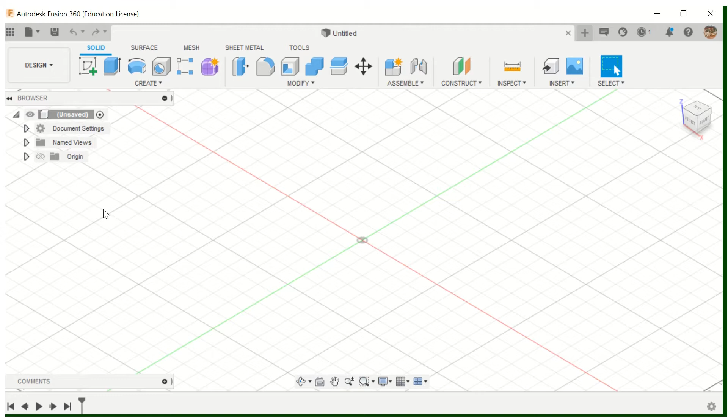The purpose of this video is to work through making holes in Fusion. It's not something we do a whole lot, but we'll see how it goes.

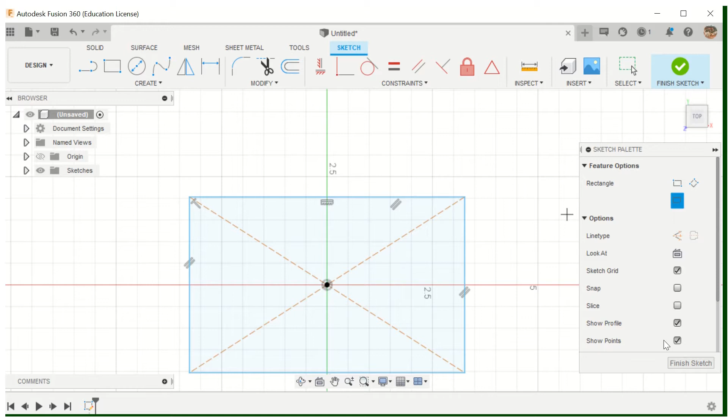So I'm going to create a sketch, and I'm going to create something fairly simple. Let's do a center rectangle, and let's make sure we have some decent dimension. We'll make this 10 inches, and we'll make it 10 by 6.

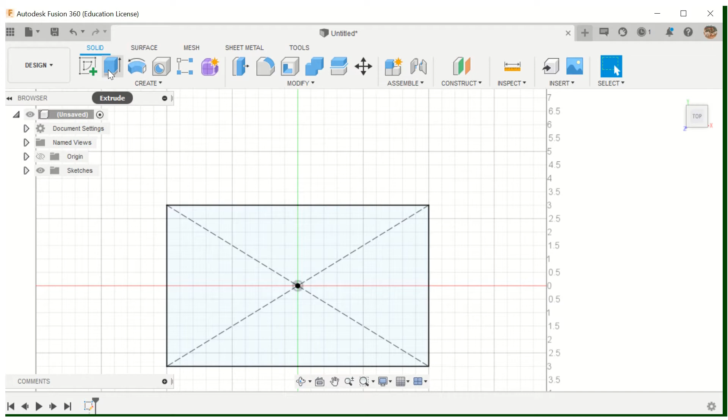Okay, so what's that look like? That looks good. All right, and then let's extrude this, and let's extrude it up to 5 inches. Okay, so basically we've got this nice rectangular prism, and we're going to put some holes in it.

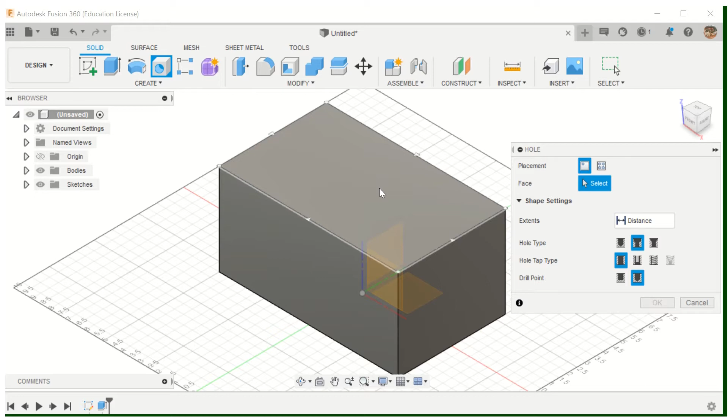So we've got a hole tool here, and if you've played around with this a little bit, hopefully some of this stuff will make more sense to you. You've got a couple options. You can do a single hole, like if I wanted to put a hole at the center, because I used a center rectangle, I could pick that option. You can also pick multiple holes, so you can click several different places at once and do multiple holes. So we're going to do one hole, and where did I put that?

I would like that to be at the center. Whoa, what did I just do? Oh crap. Okay, let's try that again.

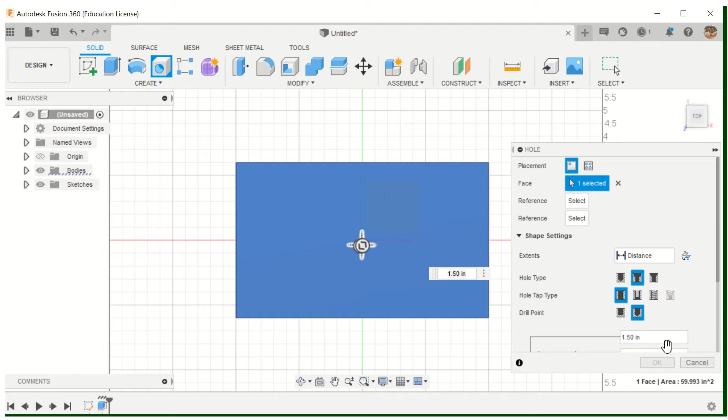Hole, and then we're going to place it, and we're going to pick this face, and I would like to snap it to that point, to snap it to the center point. Not sure I did though. Let me try one more time. Oh, wait a minute, I just made more than one hole. Definitely don't want to do that. Okay.

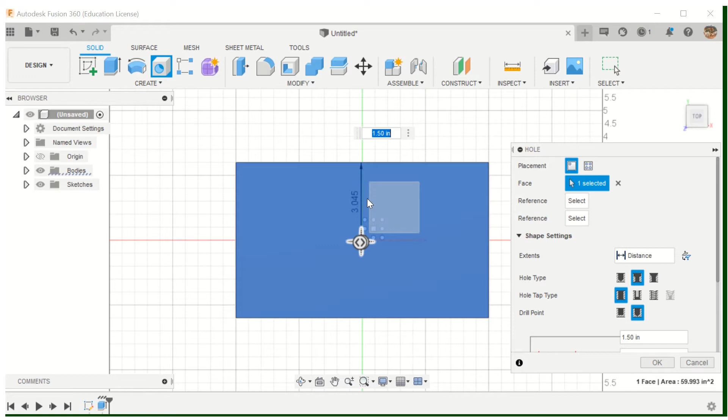Okay, so we would like to place my hole, one hole, a single hole, and I would like to place it here. Okay, and this was at 6. Snap to point. There we go. I think that snapped it for me to 1.5 inches.

All right, now some of this should make more sense to you. Like what kind of hole do you want - a simple hole, a counterbore hole, a countersink? Don't worry about the hole tap type or the drill point. But right here, I should be able to control the dimensions of this hole.

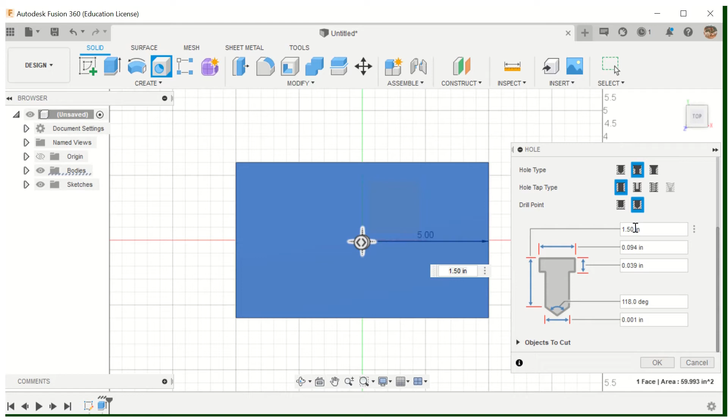So let's say I want the top, it's set for 1.5, but let's just set it for 1 inch for the top. That's fine, that's the hole. How far did I make it go? I made it go, let's make it go 4 inches.

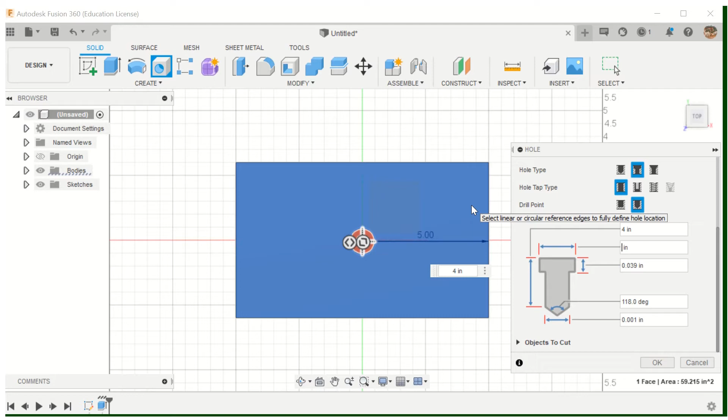And the diameter of the top part of the hole, this is really, really small. I do want to be able to see it. If I make it 1 inch, that looks about right. Let's make it a little bit bigger, 2 inches.

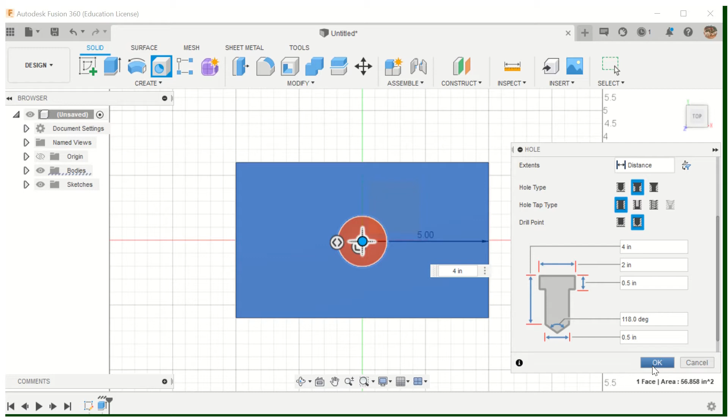All right, and I would like to go - well, I'm just making up stuff here because I don't know what I want, I don't think I care - 1/2 inch. And then the diameter of the hole itself is really small right now. Let's make that - the wider part is 2 inches - let's make this 1/2 inch. Okay, and you should have a hole there.

Okay, now what I'd like to do - there's a couple things we can do to take a look at it. If you hover over it, you should be able to see the hole. You can see the feature in there. I can hover over that.

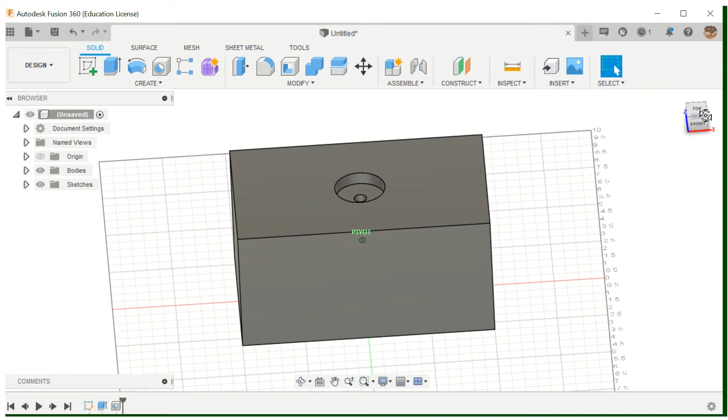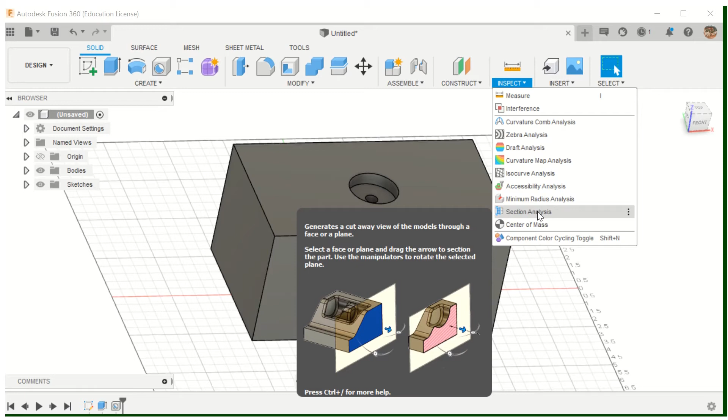We can also do what's called a section view. I haven't done this in a really long time, so we would like to do a section analysis of it. I'm on inspect with the drop down menu, and we're looking at section analysis, and pretty much what that will allow us to do is take a plane and move it through the object so we can see what's inside. It's pretty cool. Okay, so I'm going to pick this plane.

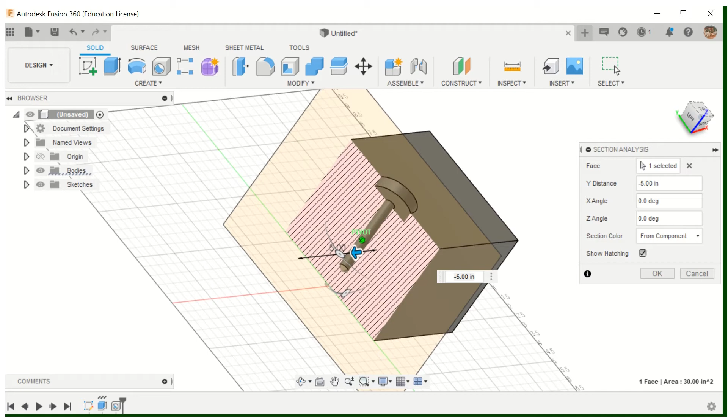All right, and what it does is it sets this plane parallel to that surface, and as I cut through, notice that it starts to show me what's inside. You can actually drag that plane all the way through. It's kind of boring there—this is the only place we have anything interesting happening.

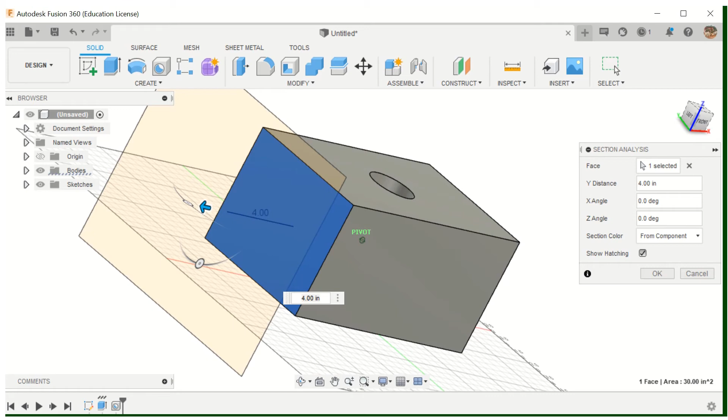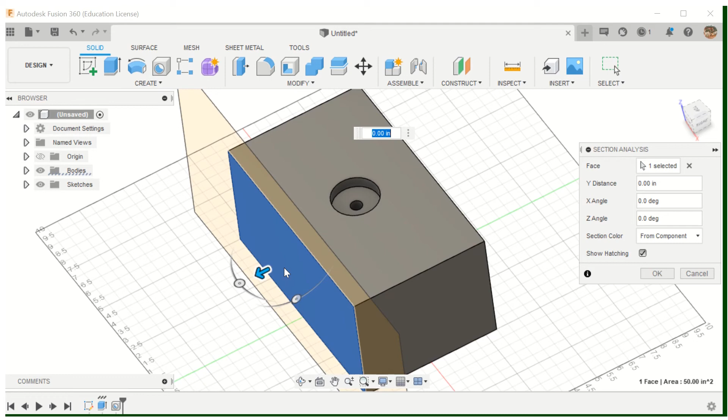But that's a way to see what's inside, because without it you can't really see what's happening. You can tell it's not a through hole because we're not seeing daylight on the other side, but you can't see anything about the hole. So that section analysis allows you to place that plane through there so you can see better what's going on. I could put it through the front also, except there's not a huge point to it because it's the same hole no matter which way you look—it's all symmetrical—but you can look at it from different angles, which is kind of cool.

Now, I don't really want to go through the process of doing a drawing on this, but I also kind of want to show it to you.

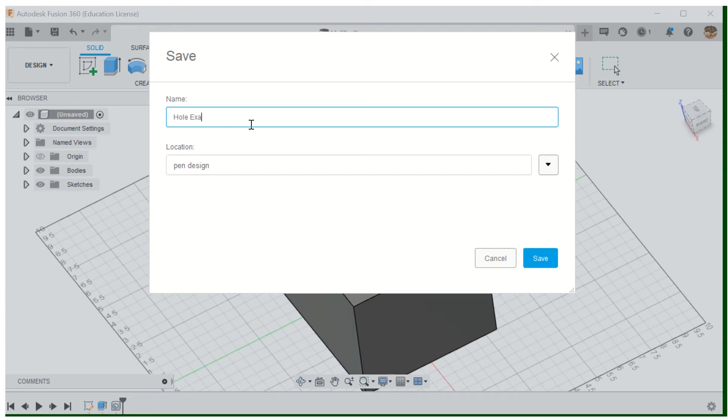So we'll title this hole example. And I only have one project there, so pen design it is. Fantastic. Save button, there we go.

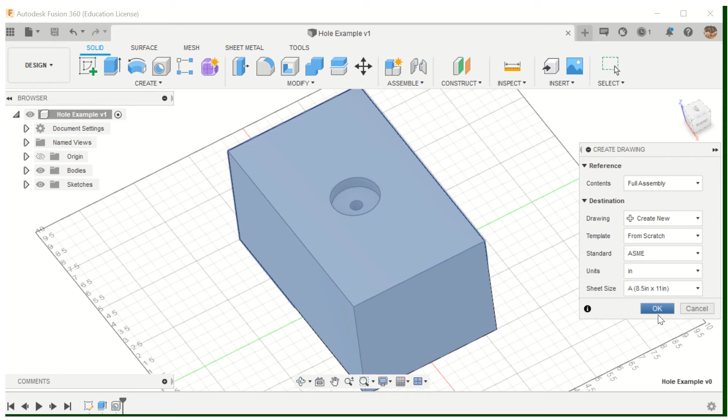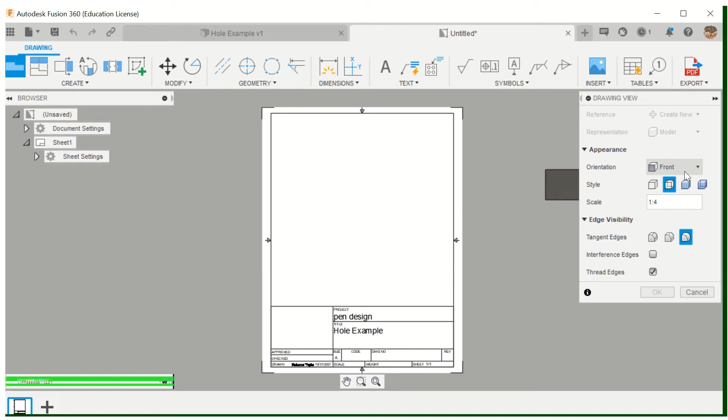Okay, and I would like to create a new drawing—ASME, I'll put it on our size A paper. Let's see what it does for us. Ah, fascinating. Okay, I guess that is what... no, there we go. Okay, and that looks pretty good.

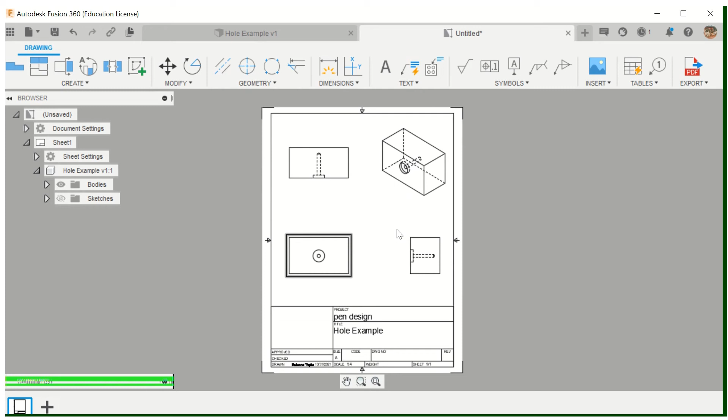And then we'll do our projected view and our isometric. Okay, and then check our little green dot. And then we're going to right click, left click, there we go. Make that solid.

There we go. Okay, now what you can see is the hidden lines and such, which you can see from the different views. Remember that to dimension it, though, you would need to dimension it from this view. This is what I was talking about, the section view in the video.

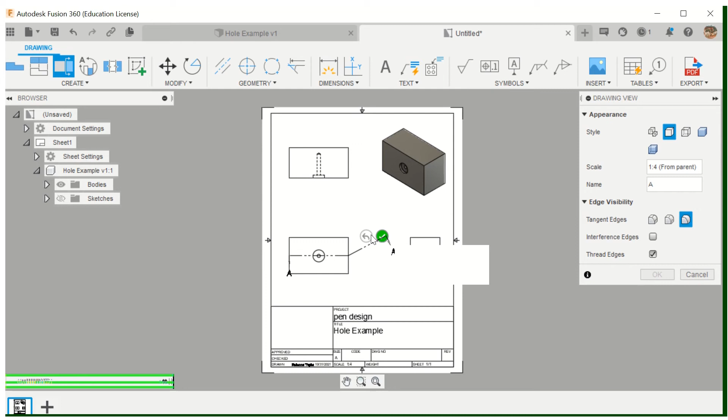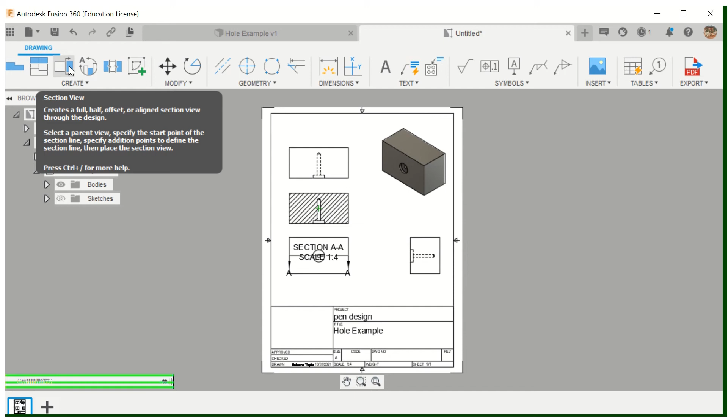So if you wanted to make a section view, you could do this and cut it that way, and it gives you that view, which in this case looks just like the top view, so maybe it's a moot point, but the hash marks in there indicate that that is solid material. So maybe this isn't the greatest example, but that's how you do it. I encourage you to explore with that, because sometimes you would need to show that.

Then we have like a break view.

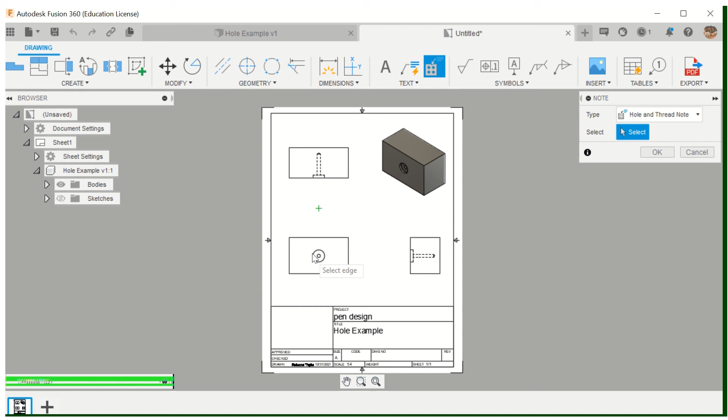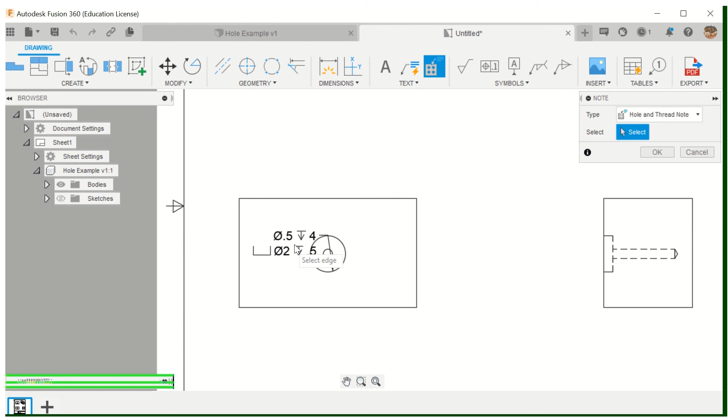Okay, so here we have the hole and thread note, and we're going to select—I kind of just want the whole note, but... and there it is. I don't really want it located there, but okay, let's see if we can move it. Can I move it? Nope. Edit view, annotation. Okay, it's not where I want it to be. There we go, click it and move it.

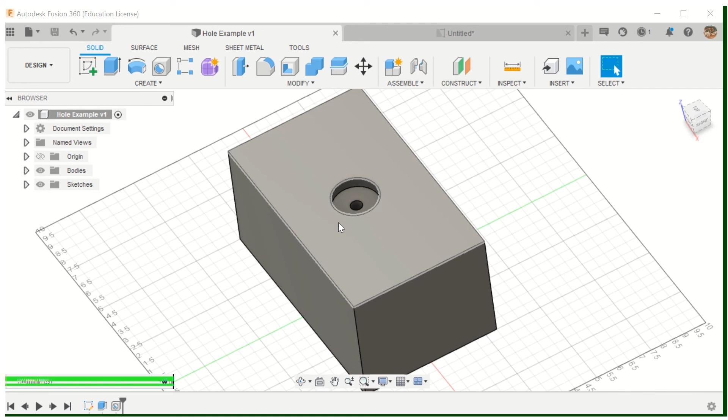Okay, and there's the hole note that we have. So this matches the information that I put in the design over here, okay, when I made the hole. You can see the diameter of the hole itself was a half inch. It went 4 inches into the 5-inch block, which makes sense if we look over there. The diameter of the top part here was 2 inches, and that looks right—this is 2 inches all the way across, this is a half inch, and then that goes a half inch in, and this was a counter bore hole.

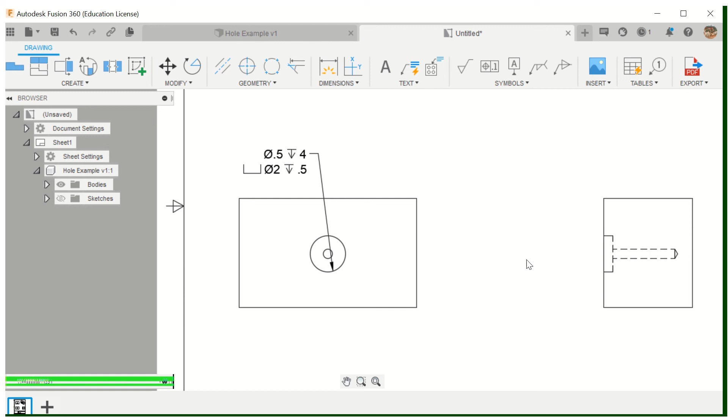So it is very likely that I am going to ask you to demonstrate this skill in Fusion, and this is going to be your reference video. Sorry that is not quite as smooth as I would have liked.

You find that hole note over here with the text, okay? So it's text that you would put in, you do the hole and thread note, okay? So that's where that is. Hopefully this does help, and just be paying attention in class for what you will need to do to demonstrate your ability to do hole notes.